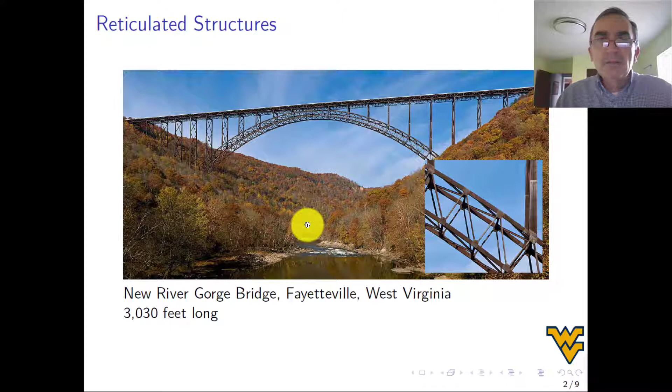All right, so I also illustrate this to show you how important it is that you know statics and mechanics of materials basic concepts, because all the problems start like this. So if you cannot do the basics, then you cannot go to advanced topics. You cannot go to fatigue design, chapter 6 in this class, because all the problems require that you do the statics and then you calculate internal forces, do bending moment diagrams, and know how to work with Mohr's circle. So the foundation has to be there, and that's why we're reviewing everything, okay?

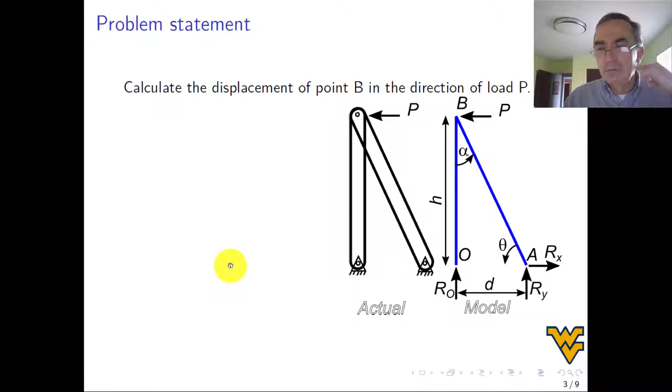Okay, so next, some facts about reticulated structures. First, in a reticulated structure, all members are joined by pins, okay, or almost pins, like in the case of the bridge. Now, since the pins cannot transfer moment, all members are bending free, moment equal to 0. And actually, that's what makes the structure efficient. All right, we'll discuss this further later.

Okay, so bending moment in any of these members is 0, because there is no way to transfer bending moment inside any of these bars. Furthermore, these members can only hold axial load in tension and compression. So in any of these members, this one or here, the load has to go in this direction. There is no other way the load can go. It has to go from one pin to the other pin. All right, and so here go this direction.

All right. Now, since member OB is vertical and the load has to go in this direction because this is a reticulated structure, the only way it has to go is this way, then all the internal force in OB equals the reaction R sub 0, all right? So OB is in compression.

If R0 comes out to be positive when we do the analysis, you know, I put the arrow in some sort of arbitrary orientation that I pick, and if it comes out to be positive, then the member is going to be in compression, all right? But since this force equals exactly R sub 0, you see there is no R sub x.

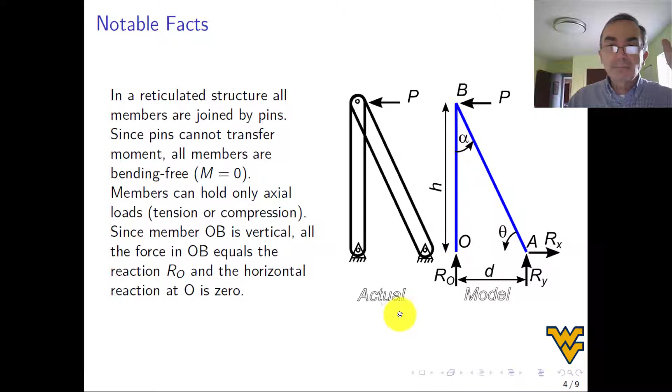Okay, so now we start working on the problem. The load P is 800 newtons and the angle theta is 60 degrees. So these are the data for the problem, all right? Also, we know that H, this height, is 900 millimeters. And with that information, I calculated for you the distance D, which is handy to have, at 519.6, okay?

So now we want to go for the reactions first. One reaction we know is 0, so we don't worry about that. First, summation of forces in the x direction is equal to 0. The only forces in the x direction are Rx and P. And since I was lucky, I drew this pointing this way and P is pointing this way, then Rx has to be equal to P. Because there is nothing else that is going to hold this P. So this P is held by this Rx, and it's 800 newtons, okay?

Now, of course, after you have this Rx, things happen. So next, what we have to do is try to calculate this R sub y, which is part of the technique about solving reticulated structures. We want to try to resolve everything at a node. The end of a member is a node. So at this node, we already know Rx, so why don't we just try to get R sub y? So how do we do that?

Summation of moment with respect to O. Why with respect to O? Because I don't want to deal with this R0 that right now I don't know how much it is. So I eliminate it. So I take moment with respect to O. Then I do P multiplied by H. Yes, counterclockwise. And then what else?

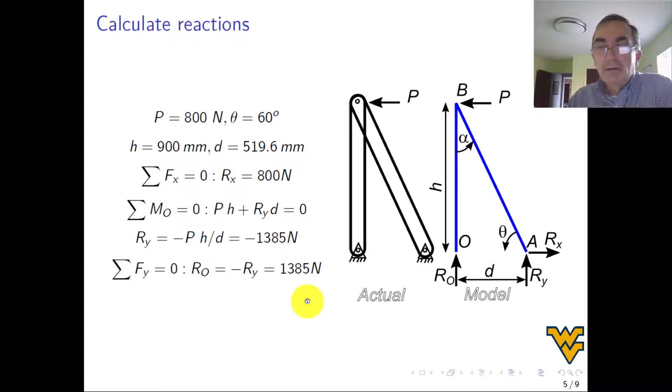All right, so next, now we go into the internal forces. And we want these internal forces with sign. If the sign is positive, that means it's traction. So we start with member OB, which is the easiest. OB is the vertical. And since R sub 0 is 1385, we push on OB, then obviously OB is in compression. Therefore, the internal force FOB is minus 1385 in compression, because R sub 0 is positive, so it's pushing on this member, yes?

And so then we go to member AB, and the force in member AB will be the resultant of Rx and R sub y. R sub y is negative, so the arrow actually should be pointing this way. So we do the square root of this arrow squared plus this arrow squared to get the resultant. And the resultant is 1600 newtons, positive, tensile. And if you think about it, it makes sense. When you put this load P, this bar goes into tension, and this bar goes into compression, and then everything is in equilibrium.

So, all right, now we have the reactions, and we have the internal forces. FOB is minus 1385 in compression. FOB is the internal force in this member, and FAB in AB, which is this member, is 1600 in tension, okay?

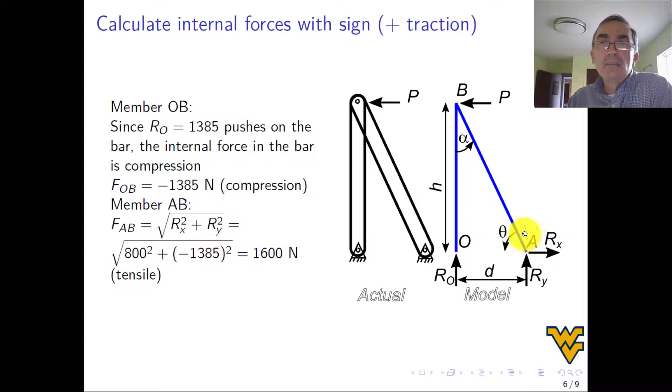Now, to calculate the deformation at point B, first we have to calculate the deformation in all the members. And to calculate the deformation, we'll use this well-known formula. The elongation of a member delta is force times length divided by modulus of elasticity times area. And so the modulus of elasticity of steel is 207 × 10^3 megapascals. And the cross-sectional area is 81 mm².

Okay, so another thing that you may want to get used to is that I don't like to work in pascals and square meters because those are crazy values. Megapascals go with square millimeters and newtons very nicely, pretty much the way KSI go with inches in the US system. All right, so we need to use delta = FL/EA, and for that I'm giving you the modulus and the cross-sectional area of the bar.

All right, so then we calculate the elongation of each member, because we know the internal force. And so member OB, which is the vertical, F_OB is minus 1385 that we calculated before. So we apply the formula, force minus 1385, length is 900, remember H is 900, divided by 207 × 10^3 times 81, and this is going to come out directly in millimeters.

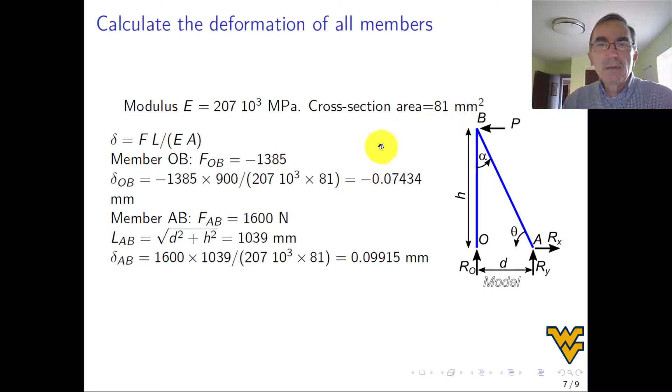So delta OB is how much this bar shrinks, and delta AB is how much this bar stretches this way. So once we have that, now we do a drawing of the deformation only. A fancy term for that is kinematics. So at this point, delta OA is this and is negative because remember it was in compression, but it doesn't do anything to help us with delta B, which is this displacement.

Remember, we need the horizontal displacement of point B, which is going to be this way, but I drew it up here. I like it better to draw it up there. It's the same. So this delta B is this displacement, and the way I can calculate this displacement is I can take delta AB, which is the stretching of this bar, and then multiply by the sine of this angle, which is the same as this angle, so that's alpha.

So delta B is delta AB, which I already know, multiplied by sine of alpha, and sine of alpha is d divided by this, so that's 0.5. So I get to this final answer. So I know the displacement in the direction of the load, which I can use for whatever, okay?

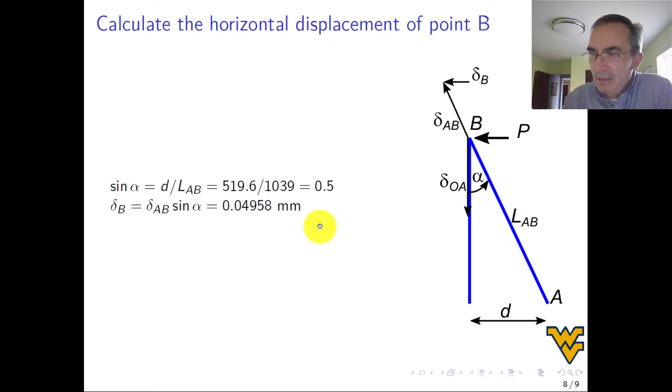So then we have some conclusions for reticulated structures. Remember, all members are in tension or compression only. That means that the force goes along the member and they cannot carry any moment. To calculate the reactions, you calculate them as usual because the structure as a whole can carry moment. So you can do summation of moments equal to 0 on the whole structure to find out stuff like we did. So you go back and you review, you'll understand.

However, this is a very simple example where calculating the reactions solves everything. If the reticulated structure has several members, then one has to find a strategy to solve one node at a time and advance until you get the answers on all nodes. And whether we do this or not depends on what examples we need to do later on in the class.

For now, I think that knowing how to do simple reticulated structures will help you a lot, particularly for machine design, where there are simple reticulated structures, usually not very complicated. For aircraft structures and civil structures, the reticulated structures could be very complicated, but they are always easy to solve. It's really not a problem.

As usual, we have homework on WeBWorK at that address over here. Next lecture will be internal forces in beams, and we're getting close to diagrams, which comes after that.